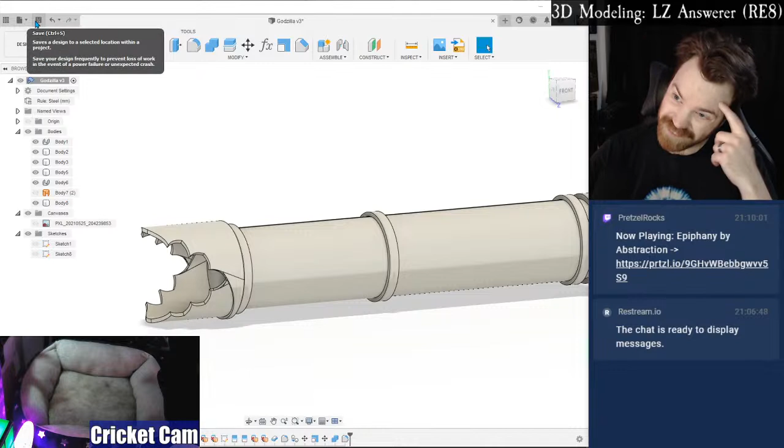Just working on a bit of a commission for a minute. I'm gonna double check everything and make sure it's doing what it's supposed to.

Cricket is here, but she has chosen not to lay in the bed for now.

Why does it keep saying... well, whatever. It keeps like from Star Wars Annual, which is the comic book from the lightsaber that I worked on last time.

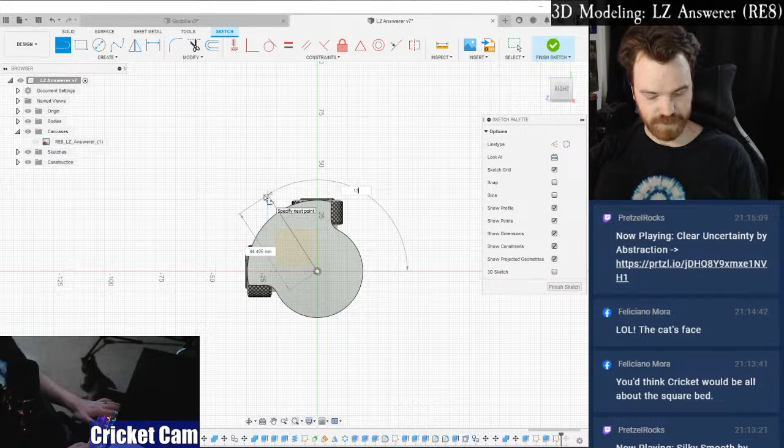And just make sure that I am. Let's see, 180 minus 45 is 135. There we go, okay, I think this will work. So split body, split this by this. Cool, okay.

So this whole thing needs to tilt just a little bit, and then this one needs to go farther. Okay, so we'll move both of these together. We're going to try like 5 degrees. And a little bit more than that.

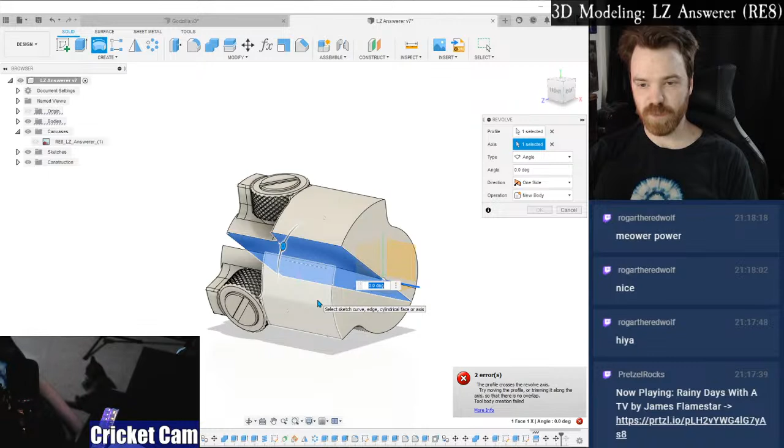And then all I got to do is revolve this around this axis. The profile crosses the revolve axis. Try moving the profile, trimming it along the axis so there's no overlap.

Oh, okay, so we have to take this profile down. Which one's going to be easier, I wonder? Basically, this has got to be split like right along the origin line there, so that this profile is split right across there.

Oh, I know what I can do, I can just split the body like that. And then just revolve that half. And that all gets rejoined together. Cool.

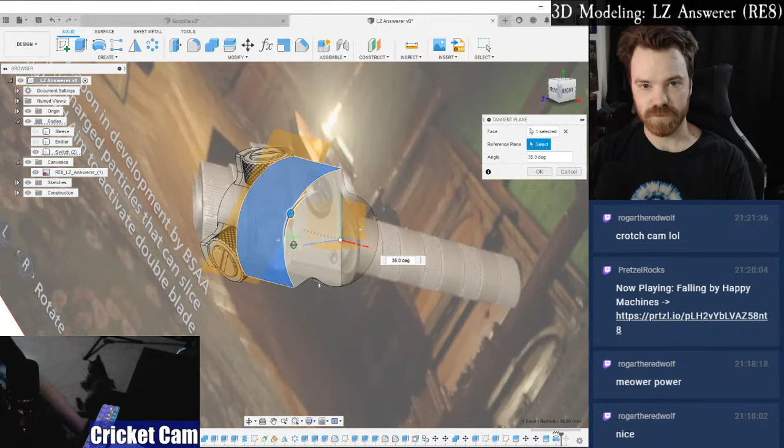So 45 would sit like right there. That's not quite right, let's go up to like, let's try 55. Sure, why not?

And then we just need the width of this. So, yeah, 25 looks about right. And I'm just gonna extrude this out so I can see what the angle looks like and see if that looks correct or not.

Okay, so that's way too high. But if I go back and edit my plane, take it back down to 35, then that sticks there, which seems close-ish. Almost, but not quite.

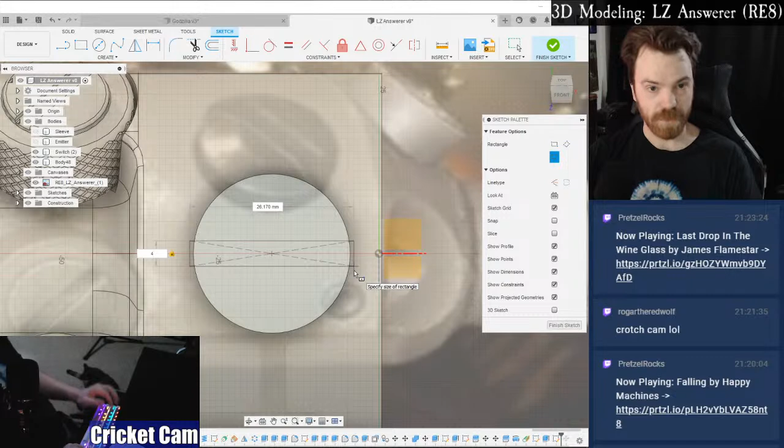And then I want to make a reference line for mirroring, because this looks like it kind of widens out on each side, doesn't it? Let's turn that stuff off. Okay, yeah, that's just a trick of the chamfer. It's actually just straight across.

So I don't need that extra line there, just need to take that and kind of match the angle.

There we go, looking pretty good. Then we'll just chamfer those.

Oh, there we go. Seems like it's taller than that. Okay, that seems more reasonable.

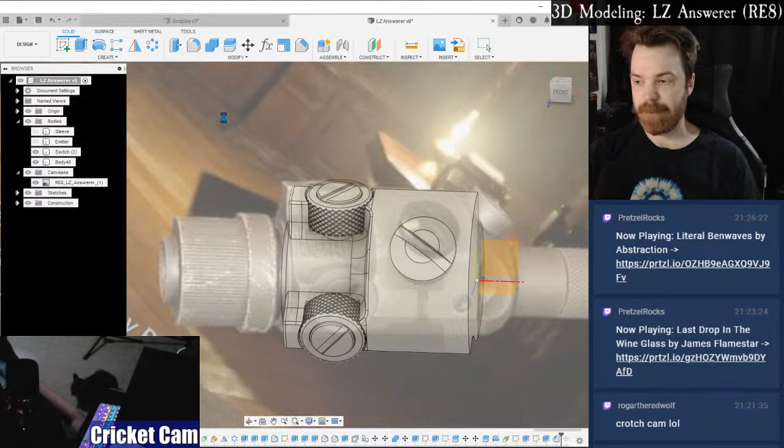All right, so now there's like a little tangent plane, but this time we need it more tangent to about there.

Yeah, maybe 7. Okay, and then let's see, I can go ahead and put this in here.

Come on now, struggling a little bit today. All right, we're gonna grab both of those.

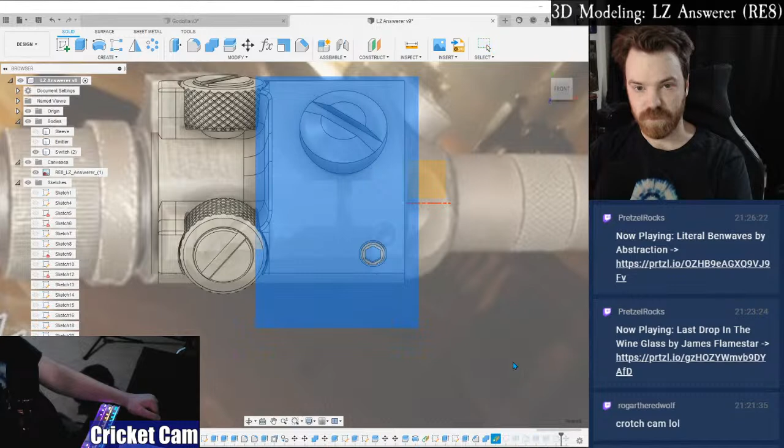There we go. All right, so it needs to move a little bit. We'll edit our feature up just a little bit. Okay, and then it needs to move to the right just a little bit.

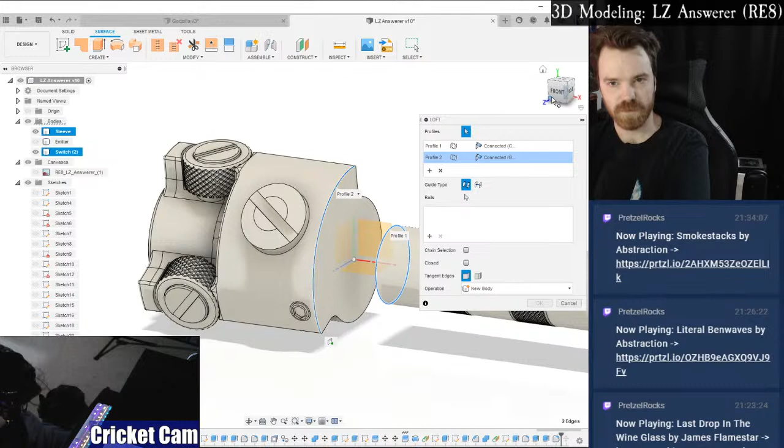Yeah, it's not liking that. Okay. Because I need to know this angle and this angle to basically create another arc right there, so that there's a separate line segment to build the surface on.

Basically a smaller version of this, but there. So I guess let me try something here. Let's see, let's go.

Okay, it says 80 degrees, so it's 10. Okay.

Or maybe what I should do is rotate this 10 degrees back so that it's 90 degrees this way. Yeah.

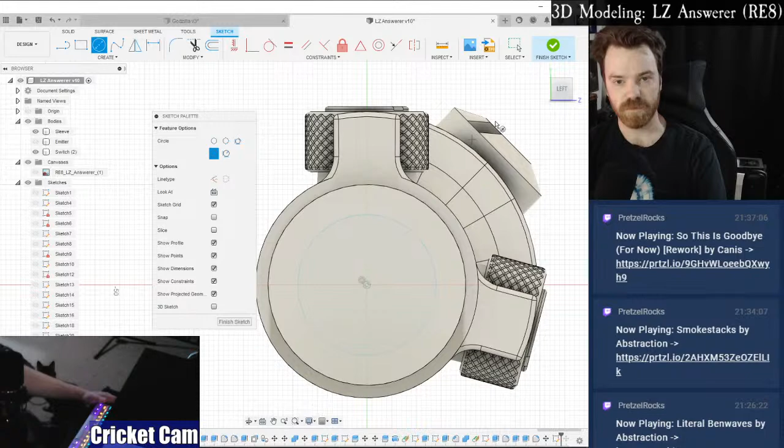Okay, maybe if I'm looking at this on the other side, then I can kind of figure out like where some of this stuff is supposed to go.

So it's like there-ish. I feel like maybe if it's just close enough, then it'll be okay. Because these lines here don't really intersect the center, so maybe if I just like do like that.

And then trim and finish, so now it should just be that one arc there. There we go.

Okay, so that kind of looks like what I'm going for, sorta. I mean, at least for this part.

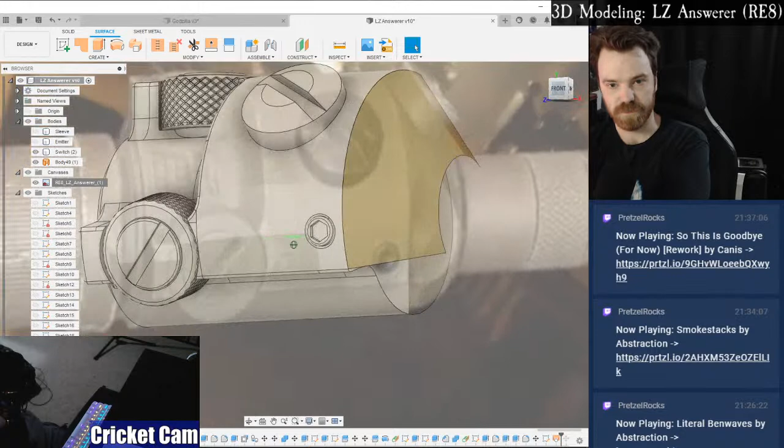Here, let's open this back up, make this semi-transparent. I need to do this, or well, like this, and then it kind of has some kind of weird transition that makes it meet with this or something. I don't know, that's so weird, that's such a weird bit there.

I'm gonna pull up Chrome, and we're gonna see if maybe anybody else has done anything with this. I mean, I doubt it, but it's worth a shot, right? Because I'm pretty sure all the views that we're gonna get from the first person just shows like that first, top portion of it. We're not gonna get a full view of it.

And there are some moments where the character kind of moves it around. This one might be helpful. I mean, it's tiny, but yeah, that's tough, that's really hard to tell what it's doing.

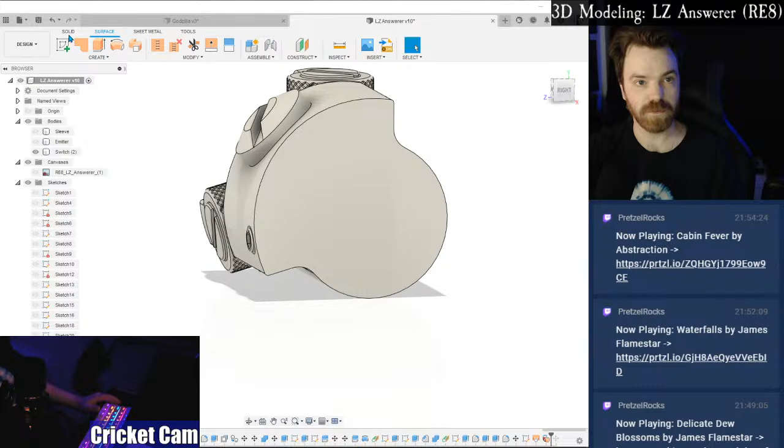Attached to, so we're going to undo that. Make sure I'm on this plane so that I can go like this and snap it. There we go. All right.

Okay, so got 12. So it's about 15 away. So yeah, so if I go 12, then that'd be a 3mm.

Go ahead and make this a new body, because we're gonna have to do some weird stuff to this one. And I think my timeline is getting a little crazy because it's slowing down on even the easy stuff. This seems like a much bigger jump than it's supposed to be, though.

Or maybe that's right. I mean, the width difference seems correct, but you know what? Let's do this. Let's grab. Let's just go ahead and insert a new canvas. I want to grab that one that we just got and scale it.

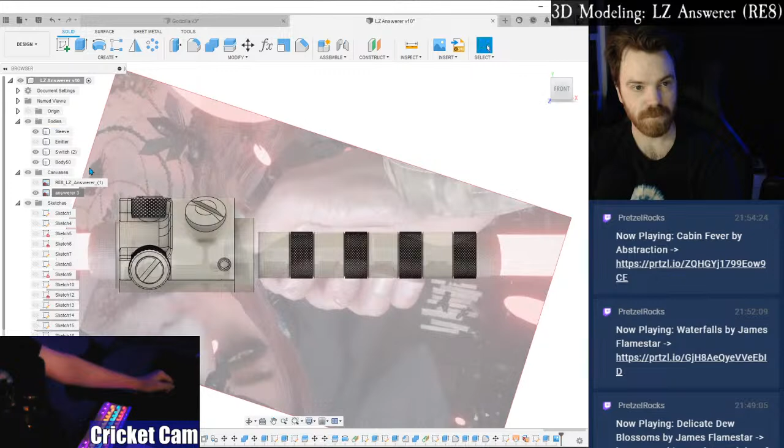That's pretty close. Okay, let's see.

Okay, the proportions are a bit different in this particular view because we've got it to there. That's where it's supposed to be.

Okay, so let's do this. Let's go inspect from here to here. Okay, so that's 133. All right. So that means from here to here should also be 133.

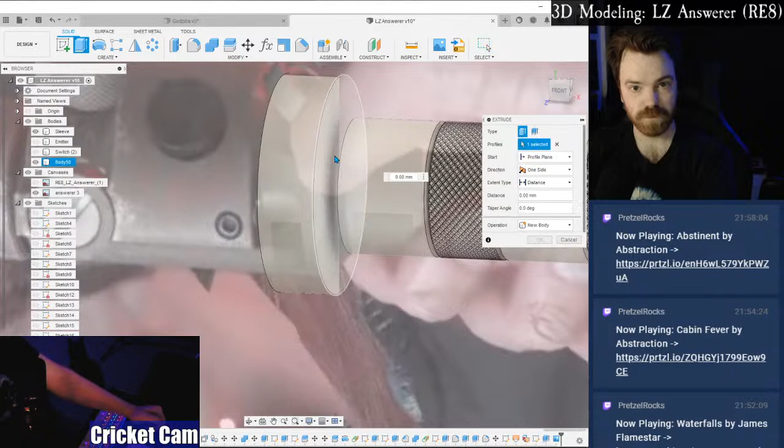Okay, so this gap is a little bit wider than what I thought it was going to be. So I'm just going to take this down a little bit. There we go.

All right. So yeah, so there's that. I'm just gonna go ahead and make that a new body because I don't want to join things just yet.

Okay. All right, let's.

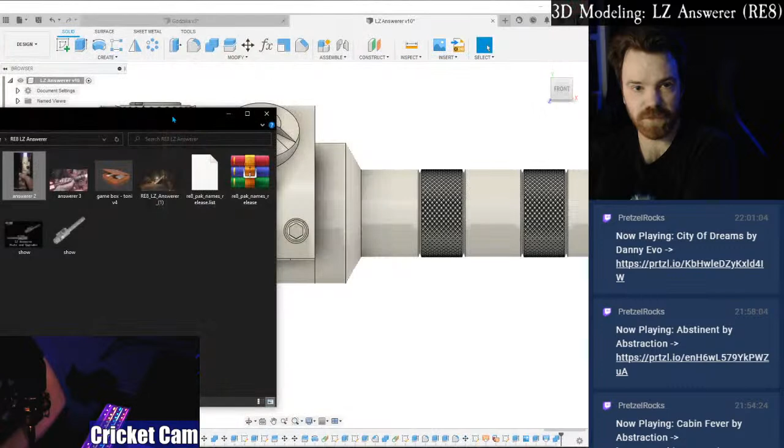So if I can get it to loft from there to there, man, I really need to see that other side. That's what I need to see. But even in this view, I'm not getting that side, I'm getting this side.

Probably gonna have to build a surface out of this. I feel like I need to see that other side. Let's go ahead and save real quick since I made some progress.

Yeah, it's definitely a lower resolution model there. Let's try.

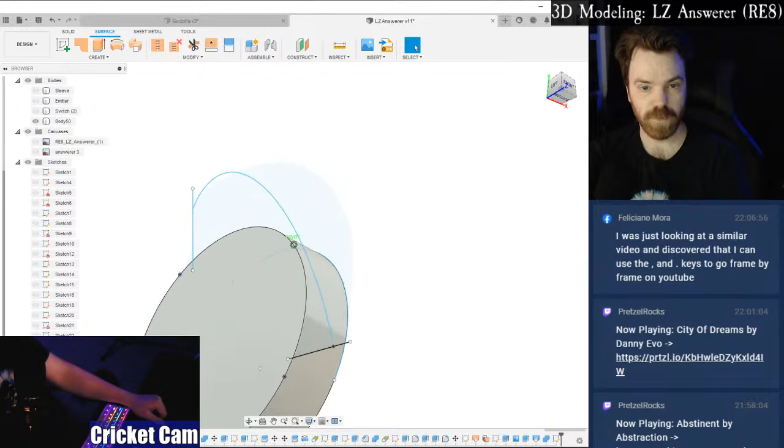Okay, that's super weird. I don't know why it's doing that. Are you still attached somewhere? What's going on?

I guess I'll make that into reference lines. Is that what it is? Nope, that's still doing that.

Okay. I guess I'll go to offset. And then make a sketch on the offset. Because if that's what you gotta do, that's what you gotta do.

I guess I was just hoping to have these references copied over. But I think I could still make it work. I'll just get as close as possible and that'll still work.

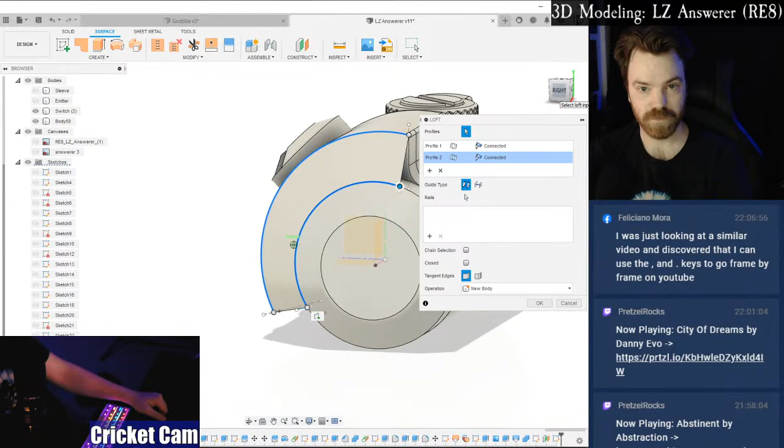Okay, this might work. We're gonna see.

Oh really? Oh man, I didn't know that. I didn't know there were shortcut keys for going frame by frame. That would have helped a lot. But that's all right.

It being that blurry, like... oh wow, that's super helpful. Oh, I guess I could go back to where he's attacking something and see if I can catch him during that swipe.

Oh, here we go. Oh, it's a new thing? Well, that's incredibly helpful, so. All right, let me grab this.

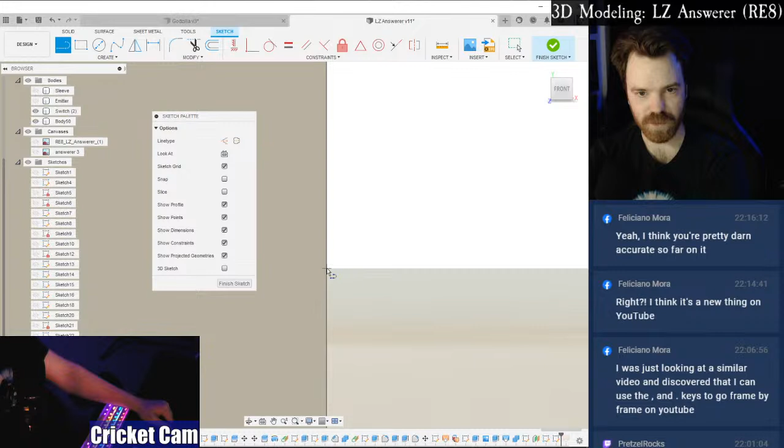Yeah, if I use the revolve tool, it should save time. The hard part about doing this is making sure that it's accurate to the other shapes that are there, because it won't snap to what's already here.

So I just have to zoom in super, super close and basically tell it that whatever that is, if it's within thousandths of a millimeter, it'll be okay. But okay, I think this is gonna work.

Cool, all right, so that did kind of work. And we can go two sides, so I can push that out. And since I built everything on degrees, then that should be...

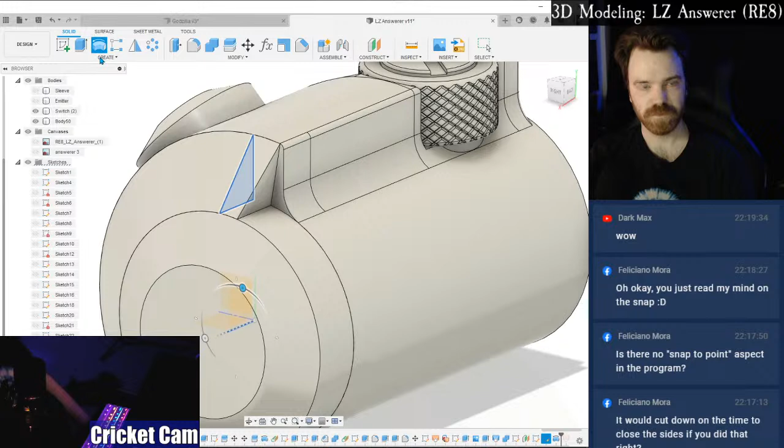Dark Max, welcome back to a new week where we're building the same thing we were last week. We're getting there. I found a 4K video of somebody using the Answerer, so I was able to get some other angles and stuff to try and make sure this is a little bit more accurate.

All right, so I think what I want to try is a loft, where I can just pick these three profiles and then go to, if I can get rid of that, I want to go to this vertex here, or at least that's what I want to try to do.

I mean, that kind of did an interesting thing, but that's not exactly what I'm going for. So I want that vertex. I think I have to make a sketch on it first and just repeat what I've already made.

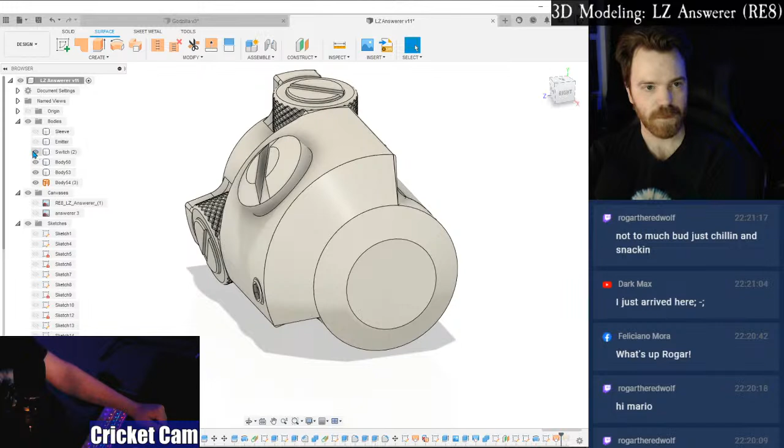So I guess what I could do is make this a surface so that I can stitch it together maybe. See, we'll see if it'll let me do it. So I want to loft from here to here, make a face, and then I want to patch. No, not that stuff. I want to patch this. Oh, okay. Why doesn't it want to do that?

Oh, the surface is going past this revolution profile for some reason. It should have been right on it since I made the initial sketch right on that to loft from one to the other. Or well, I guess it attached there. I should have added this vertex to it as well. So I guess I should go back, edit this loft, and we're gonna add this vertex.

Okay, point can only be used as the first or last profile of a loft. So it doesn't like that. Maybe if I tell it that it has rails. I don't know if that actually helped. We're going to find out. Okay, that's not what I expected to happen.

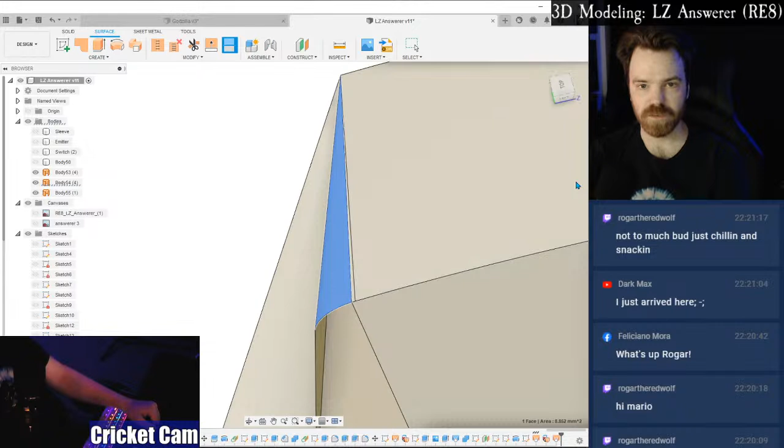Loft would intersect itself. Okay, so it is still overlapped a little bit. Okay, I think maybe I can trim this. If maybe that's the trim tool. Nope, that's not going to work. I need to split this. No, that's a different face. Maybe I just need to delete that one.

Oh, okay. Maybe I just worked it out without really knowing I worked it out. Nope, not that. Nope, stop it. Ah! Okay, so that one's attached, that one's attached. There we go. It really doesn't want to put that together. I'm not sure why.

It doesn't like it. All right, sometimes when I run into this, if I do individual lofts, then it will... Okay, self-intersecting geometry. Let's see what's going on here. Loft. Let's see if I can loft from here to here. Okay, so I can do that, and then maybe I can loft from here to here. Okay, it's letting me do that. Repeat from there to there.

Okay, so that might work because when you stitch faces together, it has a little bit of a tolerance, so it might let me do this. Yeah, okay, so see, it's gonna stitch those together. It says these are free edges because it's not - I didn't select the rest of it, but cool. All right, now I just need to do that to that end.

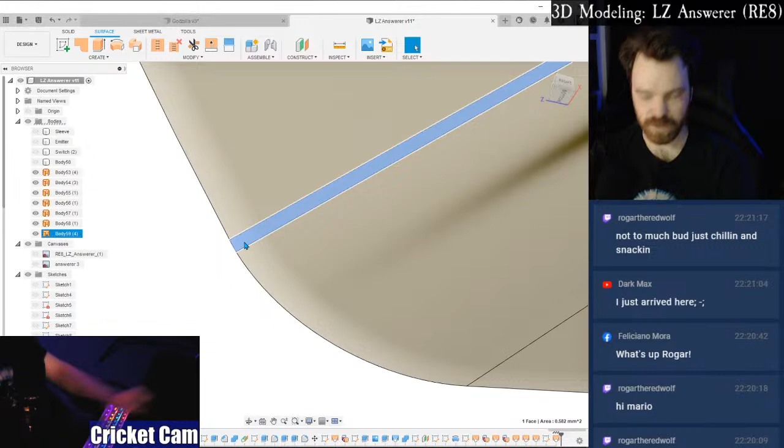All right, and then there was like a little face there. Get rid of that. There we go. Yeah, that looks right. And now we'll just repeat, taking it one at a time, so we don't end up with intersecting geometry. There we go. Stitch.

Oh. Okay, so it's got a red line there. Oh, that worked out okay. What are you angry about? So it's got... Oh, okay, so there's a gap. There is a gap somewhere.

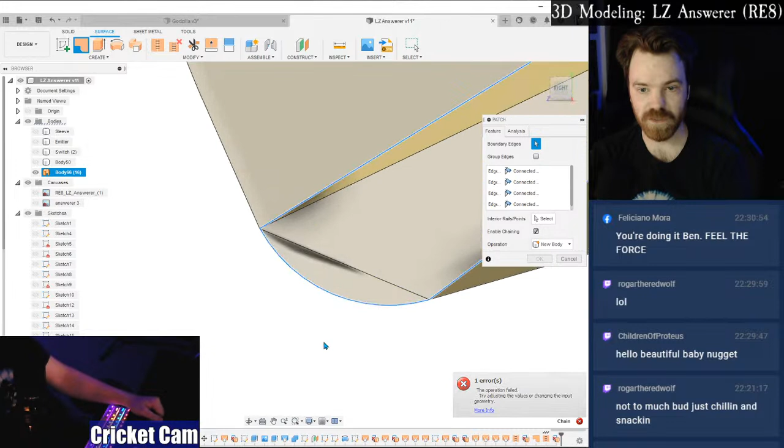Feel the force. It worked on the other side. What the heck, man? I suppose I could slice that off and mirror it, rotate it down into position and just attach it to this one. I don't know what's different about this. It shouldn't be different.

I'm gonna try this loft again. Go from here, here, and here to here. Oh, I didn't like that. Now it just won't even do it.

All right, maybe I should start over. Okay, so that's when I lofted. Deleted that face. I have to get rid of this extra face, right? Okay.

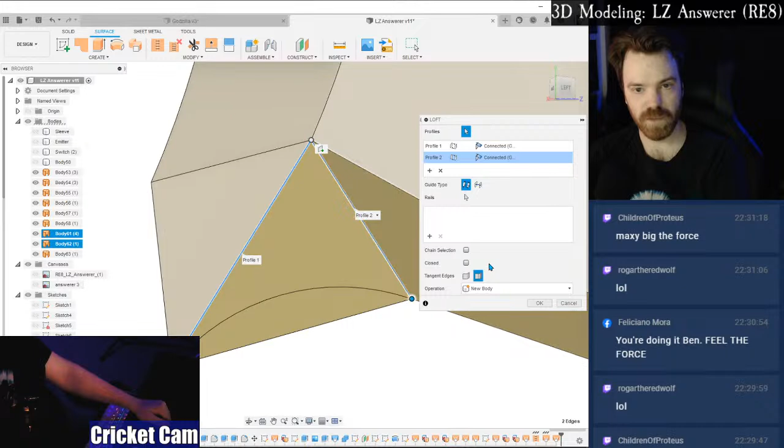Then I went from here to here to here. Nope. I patched it. I don't know what I did. There we go. All right. Hooray! It's all green. maxy big the force, oh my gosh. Okay. So that means there we go. Yeah, yeah, that looks okay.

See if I can get this to combine without it getting angry. Huzzah! It worked. A Jar Jar Binks lightsaber - that is an interesting suggestion. Might be something for the future that we can put on the list. We'll see.

Come here, kitty. Look how comfy that is. You gonna eat some food?

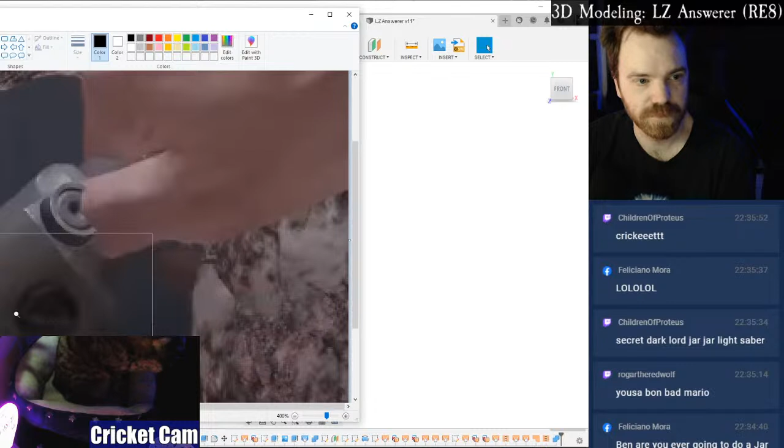Where's that other view? Didn't I get another view of it? I thought I did.

Yeah, so if you follow this line, then it's just barely different there. I probably could have widened this gap a little bit to make this slope just a little bit more, to make this just a little bit wider, because we also have to fit this giant honkin' thing there, and that looks serious. Yeah, if this has got to go there, that's not even gonna fit. So I actually have to stretch this back a ways, which is oh so awesome.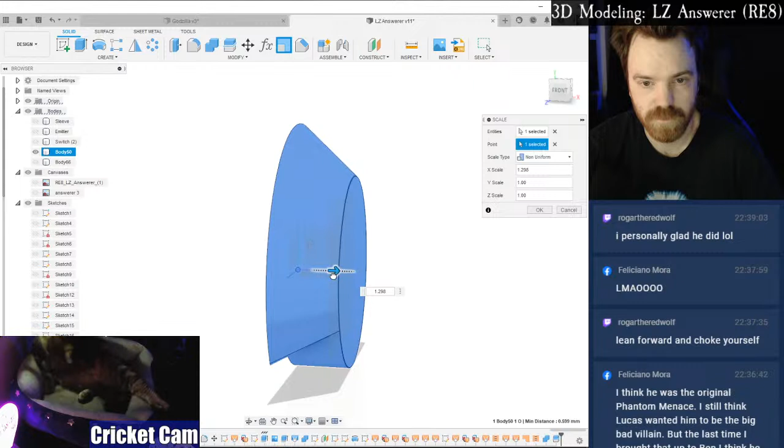I want to make sure the slopes are a little bit more different. Okay. Let's go point to point.

Yeah. Who are these people? What's going on? I think that happened to everybody when they watched episode one. But if you look at crowd reactions of people coming out of the theater that saw episode one for the first time, they were ecstatic, they thought it was amazing. And then a weird thing happened where the media and critics started telling us that Jar Jar was horrible and that episode one was trash, and for some reason we all just bought it. It wasn't really hated until much later. I still like episode one because I don't buy into that stuff. Jar Jar's a silly character, but he was meant for kids. Yoda was a silly character too, and everybody loves Yoda. But if Empire Strikes Back came out when Phantom Menace did, people would be like 'Oh, Yoda's such a stupid, silly character.' And then you learn he was a Jedi Master, and suddenly he's so cool. Come on.

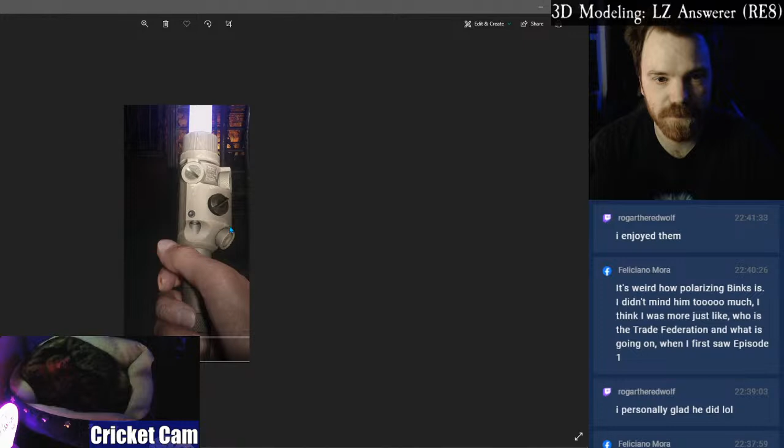All right, so if I measure, we got 17 millimeters across there now, which means the largest thing I can put there is around 15 millimeters, because it has to sit within those bounds there. But if I look at this versus that, I bet those are going to be pretty similar in size, which means that this is around 1 inch and that's around 1 inch. But just to be sure, I can measure this in Photoshop.

Oh yeah, for sure. It was the first time we got to see a double lightsaber on screen in live action, and the pod race was really cool, and it spawned the pod racing Nintendo 64 game, which is really awesome. I think there's a lot of great things about it, and I think people just have their memories colored by media and influencers that didn't like it.

Yeah, just look at Yoda's seagull song. So silly.

All right, so this is 49 pixels, and this is 49 pixels. They are exactly the same size, and I made this 25 millimeters, which means this is 25 millimeters, which means this diagonal has to be at least like 27 to have a millimeter of space on each side. So that is still not big enough.

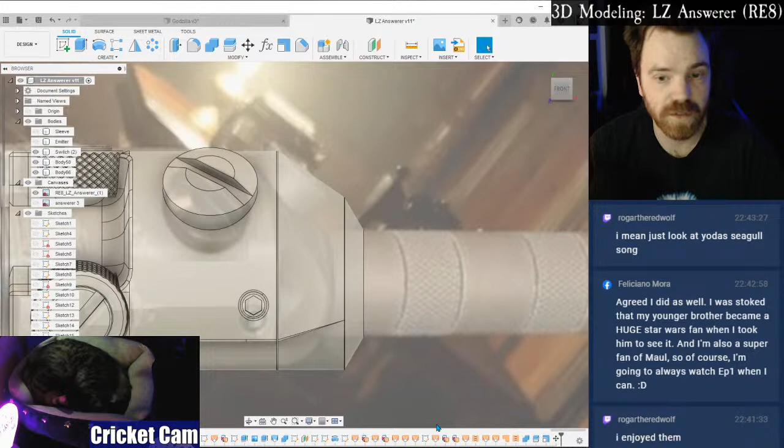Like I said, artistic interpretation, right? Makes the taper a lot more contrasting with the original there. So I'm probably gonna have to go even a little bit further. Yep, 23. Okay, oh man. All right, so we're at 2. Let's go 2.25. 25.5, we're so close.

It's gonna turn that off. I mean, I know it looks funky, but I actually think this is better. Obviously the sleeve is running into it now, so that's got to be scooted down as well, but no biggie. Let's keep pushing a little bit, I guess. We go another 10%, see where that puts us. You think 2.45? Well, now we're at 26.3, so you might be right. It might have been 2.45 as opposed to 2.35. Every 10% seems to be about half a millimeter or so, ish. There it is, 27. That's all we needed. We just need an offset of 1 millimeter on each side to be able to put that big plug there.

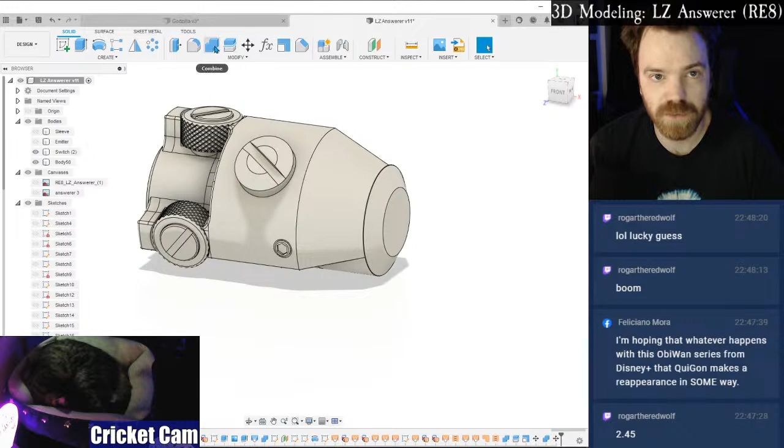Okay, I think all the other features I need to do are things that are added to this. So there's a cutout that happens here, and then there's a big button that goes there. So I feel like I can go ahead and combine these two and make that all one shape. It was a bit of a lucky guess, but that's what I have you around for. Good luck.

Yeah, it would be cool if Qui-Gon makes a reappearance in the Obi-Wan series. However, Liam Neeson has been not only tight-lipped, but he actually said he's not in it, like he hasn't been approached. Now, we've been fooled before, because they might be doing a...

There we go, like one thing. Our friends, Children of Proteus, they have their dog on camera, and they have a thing where you can pay bits, Twitch bits, to feed a treat to the dog. And I'm like, you know, if I ever do make affiliate again, maybe I'll do something like that where I'll have reward things for the cat so she can get treats and get love and all that stuff. And maybe that'll encourage her to come hang around whenever she sees me at the computer. She'll be like, ooh, if I lay in the bed, maybe I'll get treats.

Okay, so that big honking button there basically exists right on the edge of this. So if I go 90 degrees, it's going to be not quite right. So I think I need a tangent plane that is just a little bit off of that. So I'm going to try a tangent plane off of this, but instead of 90, I'm going to try 15 degrees off. And since we're going to sketch on top of this, it'll move the button as I edit this feature. So that'll be advantageous.

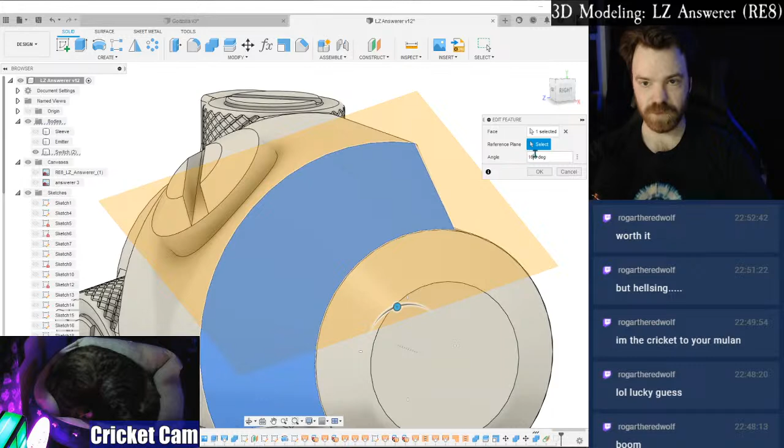Okay, so this overhangs a little bit. I think if we change the angle, let's go another 5 degrees. And that was it, 5 degrees did it. Actually, that brought us just a little bit too far from the edge, I think. I want it to be right up on the edge. So I'm gonna go like, let's go 16 degrees. Not quite.

I should have gone with my gut instinct, because my gut instinct was like, oh, do 18 degrees, split the difference. Oh, and then I get to the top and it's like, oh, look how far that is away. From here to here, it's almost 1/8 of an inch. So I can actually go back to this. Maybe go back to 17.

16. There we go. See if it reorients me here. Nope, it won't. Okay, that's fine. How do I... there we go. I just wanted to center the... Ooh, that is really, really close. Okay.

Let's go in here, and we'll go back to... You know what? Let's go 16.5. Give just a little bit of space. There we go. Yeah, so it's like right up on that edge there, which is what I see in the images.

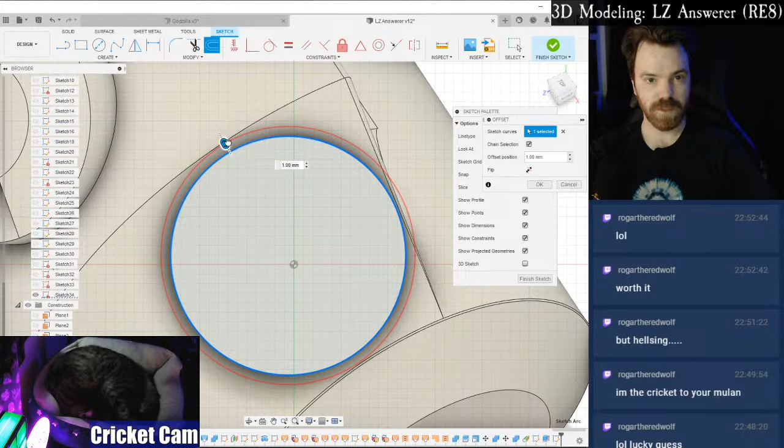Looks like that might be the activation button, because that's kind of naturally where your thumb would sit. So we need an offset, and then it looks like maybe like a spherical indentation, maybe. Yeah. Okay. So let's offset this. It looked like maybe around

-4. And then let's do, okay, so that's 17. So let's do something close to that for the button, the button that you depress part. All right, so then we'll grab that, cut in.

Okay. And let's see. Yep, definitely filleted on this one. And then maybe like a small fillet on these, just to set that back. And then let's turn that sketch back on. We'll create a sphere.

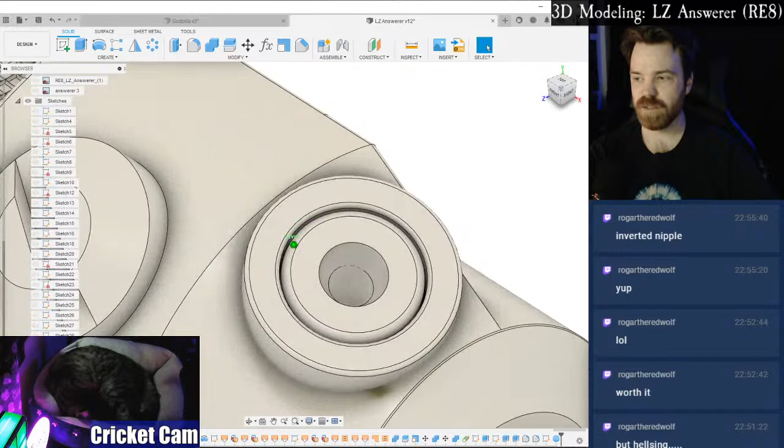that looks about right. Let's see if just a straight up cut. Yep. Alexa, stop. I don't know why she decided to tell me about Bahrain. That's really weird.

I'm wondering if I should make that shallower. Make a new body. Scale it. Pick a new point. Go down to like 0.5. And it looks like I need to rotate it as well. What is happening right now?

I'm going to try and get these to line up as close as I can. There we go. Let's go ahead and cut that out the rest of the way. There we go. Join those two together. Keep this as a button. That looks pretty right on.

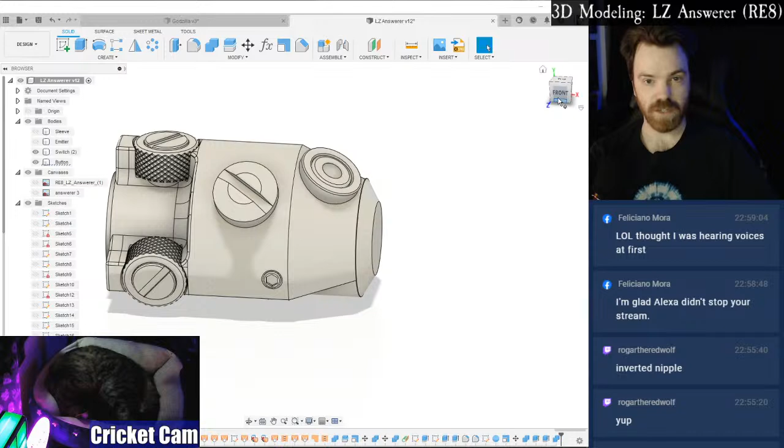All right, so then there's this weird cutout that happens like right there, which means we're going to make a shape and then use it to cut into there, and hopefully it'll be right. I do need to move the sleeve down. There, that's a little bit of a gap right there, but not a big deal.

Maybe you are hearing voices, Mora. Maybe it wasn't Alexa. I probably shouldn't say her name. She's gonna wake up and talk about things.

All right, come on. There it goes. All right, all good and saved. Enough, like, and... like you can't even see that extra end piece coming off of that.

I mean, none of these views are like perfect, but I think just proportionally, I'd like the handle just a little bit longer. So we might have to go back and change that a little bit. Just kind of lengthen these sections just a little bit maybe. Or maybe I could just like scale it and stretch it, but then that would stretch these textures too. That might not work out as easily as I want it to.

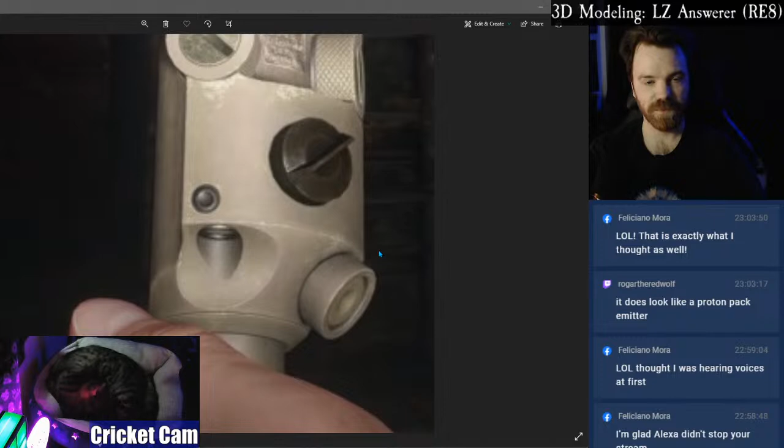All right, let's... basically I want to cut through right here. Maybe it's kind of like that.

Yeah, the fishing rod controller, that thing was weird.

All right, I want to see what this does as far as the cut goes. This might not be right. I feel like I'm close though. Like it's way shorter on the right side here, like where the cutoff stops. So maybe it's like sitting at an angle and not just a straight on thing.

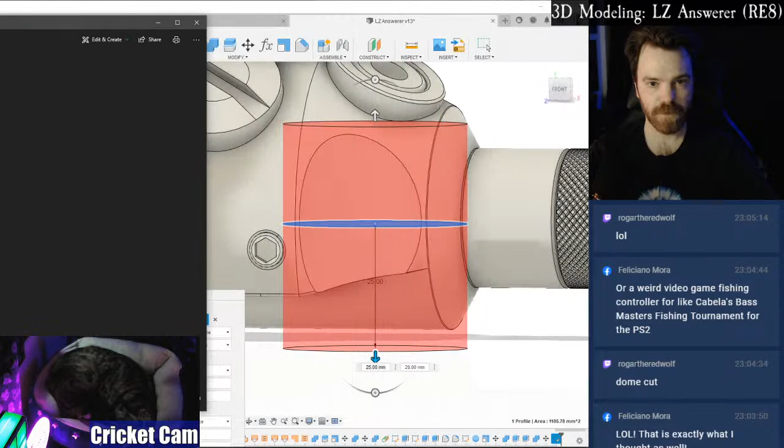Because I want it shallower, but wider. Okay. I don't know if this is what's going to do it for us, but we're going to try it. Okay, so that looks closer actually. The center of it, like you can see this curve here, it does dip back up, but the center of it, I guess. See if I can get both of these on screen.

So it almost looks right, but this right here is not right. It kind of feels like the circle itself needs to be offset, and the cut needs to start from the maximum diameter of it. So I'm going to do one side, but start from an offset, and make the offset like -20.

Okay, that didn't do anything because it's a cylinder—it's the same no matter where it is. So I think maybe it's sitting at an angle or something. It must be. Okay, so here's what I could try to do.

I can just make, okay, actually the profile plane—just make it big enough. And instead of cutting, let's just make it a body. Then maybe I can rotate this where it's going to intersect better. I don't know.

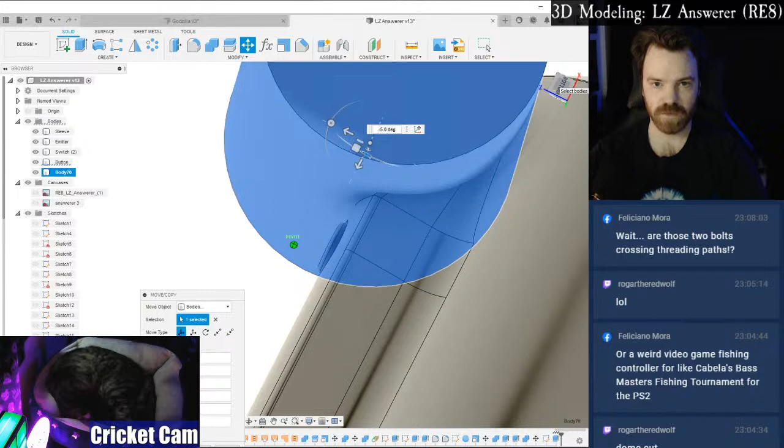So if I go 5 degrees this way, it cuts in right there where it's supposed to, but then this side is messed up because that goes way too far. Okay.

I suppose I could, hang on. Okay, the diameter is 37.5. So I know how big the circle is. Okay, maybe I can...

Edit sketch, grab it, move copy it, and then we're just going to rotate it. I think 10 degrees is almost there. 15 is more correct, I guess. Wish I could get where I can view this straight on, automatically, because I think I need to be here.

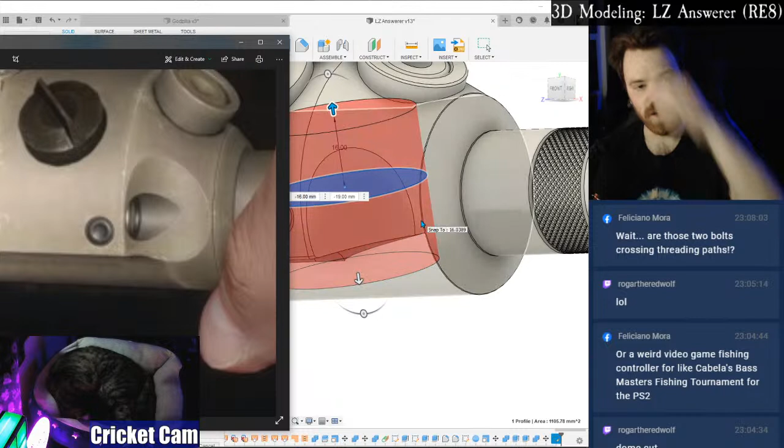I guess maybe it's not completely... I guess it's maybe not a cylinder. Maybe it's like a weird ball shape. Maybe we need to make a sphere and squish it around until it looks right, and then use combine to cut it out, because I think doing a single profile just isn't quite right.

Are those two bolts crossing threading paths? Probably. Well, unless this one is a set screw, then whatever this is, is some kind of adjustment, and the set screw holds it and keeps it from unscrewing. So that is a possibility. I've seen that before.

But yeah, I think it's close—but it's not right. It's close, but it's not right. Maybe it doesn't have that shape because it's actually supposed to cut into this as well. But I'm just missing that.

Because even if I go farther down, yeah, I just miss it. So maybe I do need to cut in farther. Okay, idea—I want to move this in.

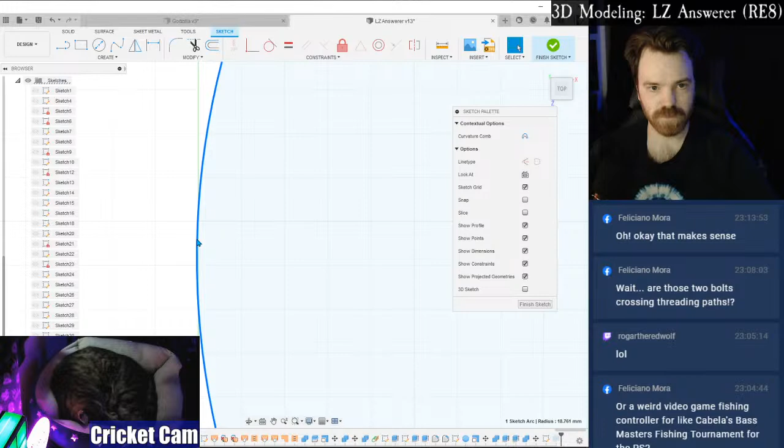All right, so I want to bring it in just a little bit. I'm gonna bring it in like—hey, come on now. Usually it lets me do that. I don't have any constraints. Why doesn't it let me pull and push and pull it around?

Let's try. See, because if I grab this, then that's just okay—yeah, that just moves it around. Usually I can pull on this, and okay, maybe I can make it a constraint. Dimension.

Okay, so let's go 37. Finish. So close—so very, very close. Okay, 36.5.

And then I want to move it over, right? So edit, and then I want to grab the whole thing and move it. Maybe not—let's go like 0.5 first. Did I do it? I don't think I did.

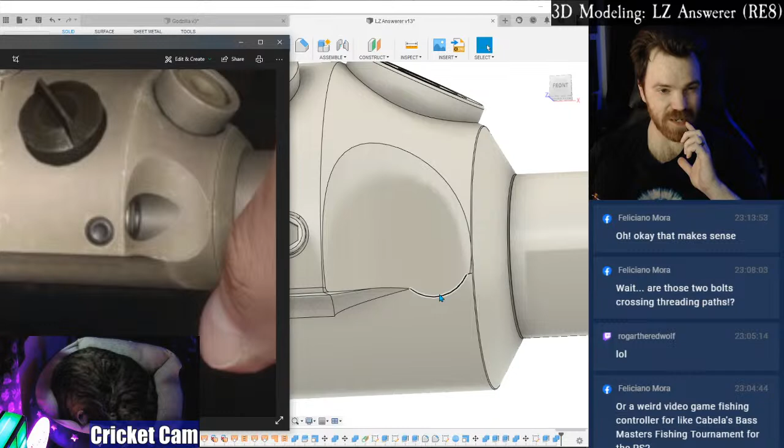Okay, so I just barely hit that, which is correct. Main difference being that this curve is a lot wider than this one is, which means it's cutting deeper, maybe. Although that seems pretty deep.

I don't know if I should make that curve more or not. But a smaller diameter circle pushed in will cut deeper and make that shape closer to correct. So, all right.

We're getting close, we're getting so close. All right, so if I go down to like 34, and then I move this in a ways, let's see what that does.

Okay, so that gets me a lot closer to this shape. Like almost exact, but it's not quite right. So I'm going to split the difference. We're going to go back to like 35, and we're going to move out a little bit.

Cool, I feel like I'm really close now. Just need to move over a little bit. Close, very close. Go down one.

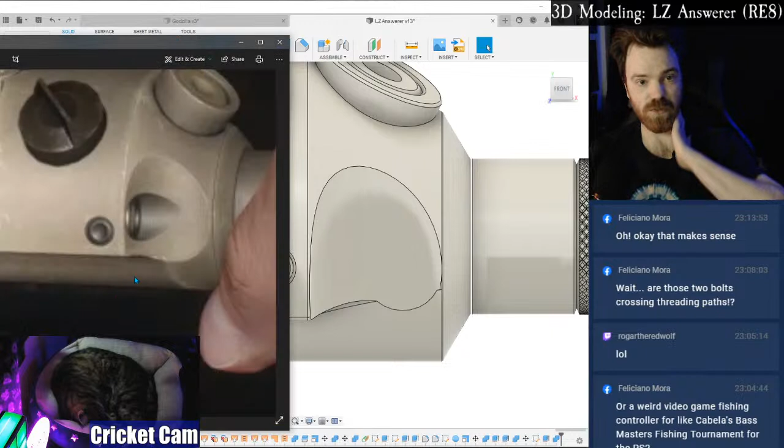Wow, all right, I think that is as close as I'm gonna get to this part of the image. Like it has like a weird curve to it, but also this is more looking like this way. So this should be much wider.

Yeah, because this is like the amount that I'm cutting into this cylinder here, and I need to do that more. So

I could also try going, oop, maybe another 5 degrees. So that cut into it more, but now it's too narrow.

Okay, hang on. I think I need to go back to like 36. And then we got to move out 0.5. And then I think I have to move this way 0.5.

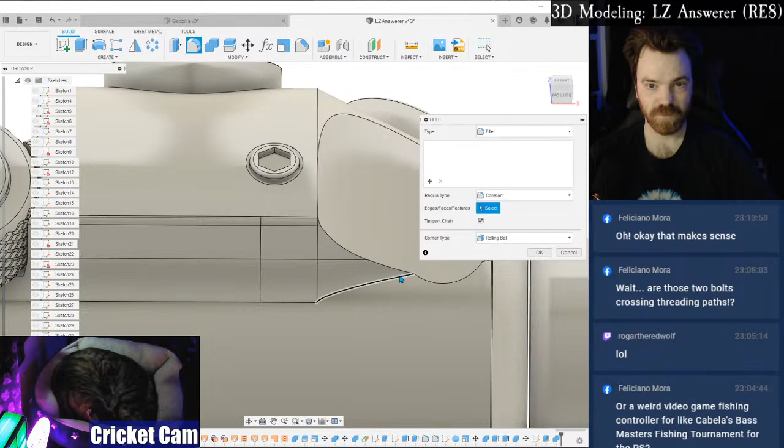Maybe that's close enough, you know? Maybe that's just where we need to be. There's a possibility, maybe, like, can I... Nope, it doesn't want to do that. Okay. Doesn't want to do that either. I thought maybe I could get it to, like, fill it or something. Nope. It definitely doesn't like that.

As I get larger diameter and pull away, this will get straighter and straighter because it won't cut into this face, and this is the face it needs to cut into, but it has to cut into it more gradually. So maybe I need to push the angle a little bit more.

I just want to try another 10 degrees. I want to see what that does. Too much. But now maybe I can go smaller in diameter.

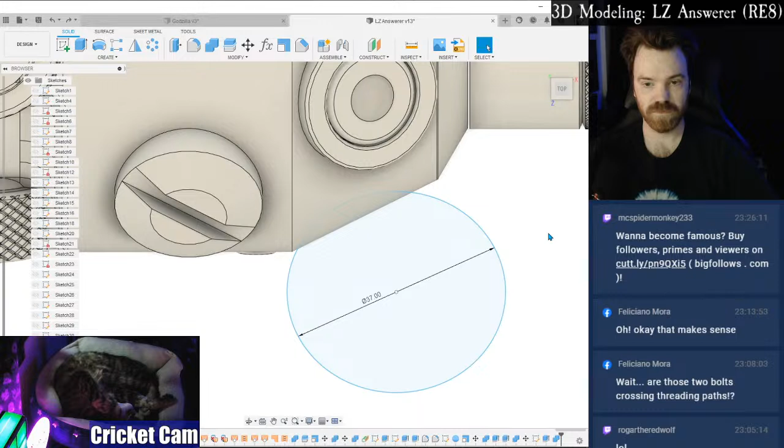All right, I'm gonna go back to where I was. Oh, I think I made it angry. Thank you, sir, appreciate it.

Okay, so this is the top-down view. If it was more like a, that way. Okay, hang on.

If I try to draw something new, it's not going to be rotated at the angle. So maybe I can make, yep, okay, I can make a plane on top of it. Make another sketch on top of the sketch. Create a spline that will, oh, hang on.

Okay, well, I just got a message from Broken Token. They contracted someone else. They said I have cool stuff, but they didn't pick me. So that is a bust. Yeah, it's all right, I kind of figured I just didn't really make the stuff that they were really hoping for. I bet if I spent a bunch of time and made like board game pieces, like terrain and stuff, then they'd be all over it. But...

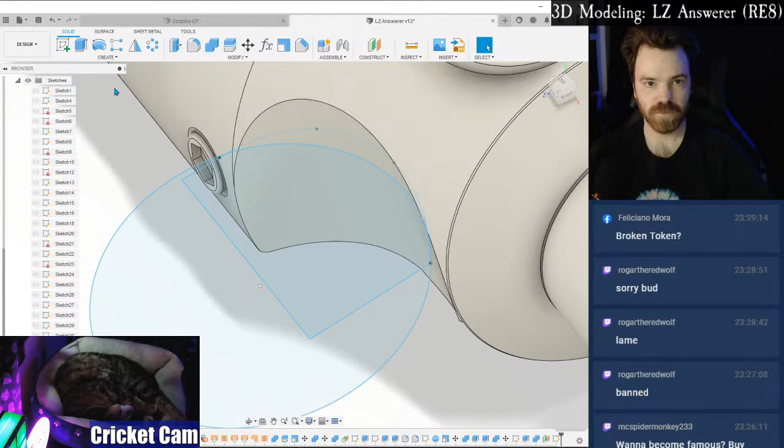Okay, I'm going to try this now. Okay, so it's definitely going to get longer that way. No, not symmetric. Oh, I guess maybe symmetric will work. Nope, not quite. Two side. Let's see what it does on the bottom here, though. Man, I was really hoping that shape would bring that out a little bit more. I mean, it kind of did.

Because if I go too deep on this way, then okay, maybe. Oh man, this is tough. This is a tough cut. All right, let's pull this down a little bit. Make this shallower too. So it's more like that, maybe. I'm gonna get rid of that.

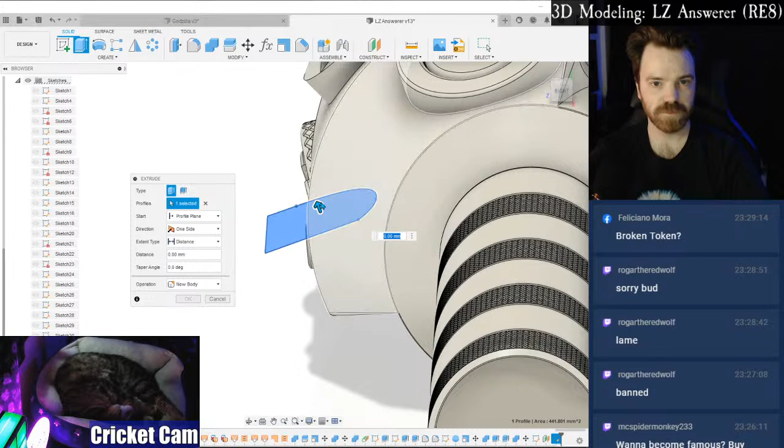All right, I think I want to take this. No, not that. I think I want to try and angle this one. Oh, I need the pivot more like there, I think. Yeah, let's just try 5 degrees out that way. Okay, that's looking pretty okay so far. But I wonder what the bottom's going to look like. Okay, so that is like almost working. It's a heck of a lot better than it was. So we're going to keep that, and then I'm just going to adjust the drawing.

No, guys, it's okay. They said if in the future, then maybe, but not a big deal. I will continue doing what I'm doing, and we will look for ways to make the lightsabers and the 3D models that I do successful.

All right, come on. Oh, there we go. I had to grab that one. That's what it was. So I got to pull that one in a little bit. We're going to pull this in a little bit, I think. All right, come on now. Okay, and I want to pull this one just a little bit. And then I want to make this even shallower. Man, I feel like I'm getting really close. What's your problem?

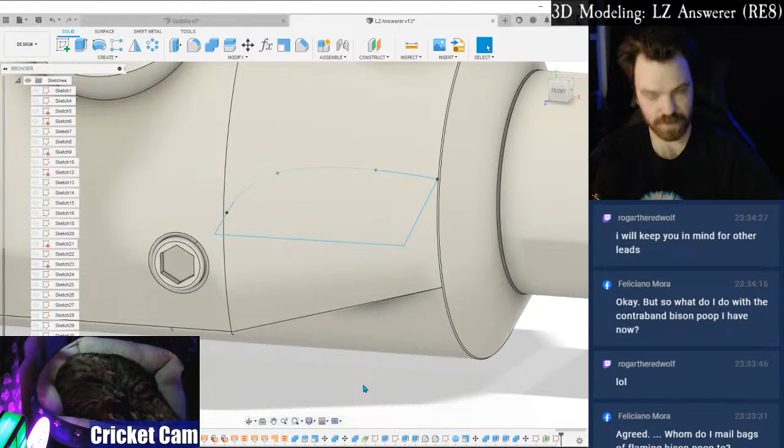Missing profile, it's right there. Okay. Well, this is weird, it won't select that as a shape anymore. Wonder why that is. All right, I guess we'll move. Oh, okay, yeah, somewhere it broke.

I'm sure we can come up with something to use your contraband bison poop for, I guess. I'm just gonna say it's really weird that you have that just kind of on hand, ready to go. Just gonna say that.

Wow, I move one vertex and then it's just like, hey, that's not a shape anymore. Like, what the hell, man? Nope, don't do that, come on. All right, come on. Okay, that's frustrating. Well, how am I supposed to change the shape if it won't let me change it?

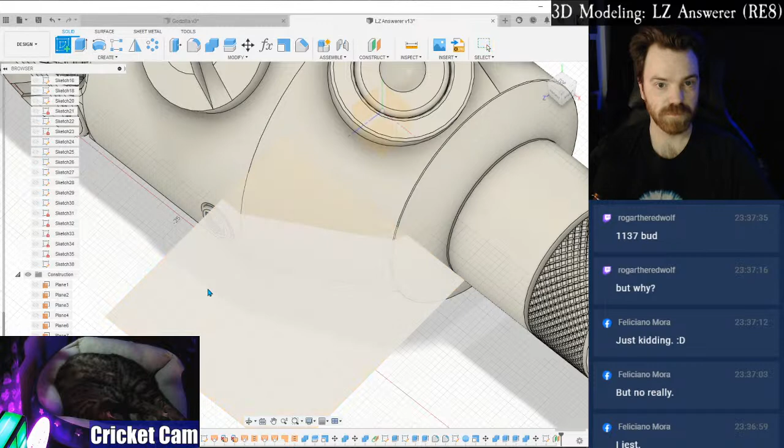Okay. Get this back open, all right. Try this again. I want from here to here. There we go, all right. That is a shape. So I'm going to go with like more like a rounded rectangle. I want to see what that does.

Oh wow. That's a long time to have poop on a shoe. Okay, interesting.

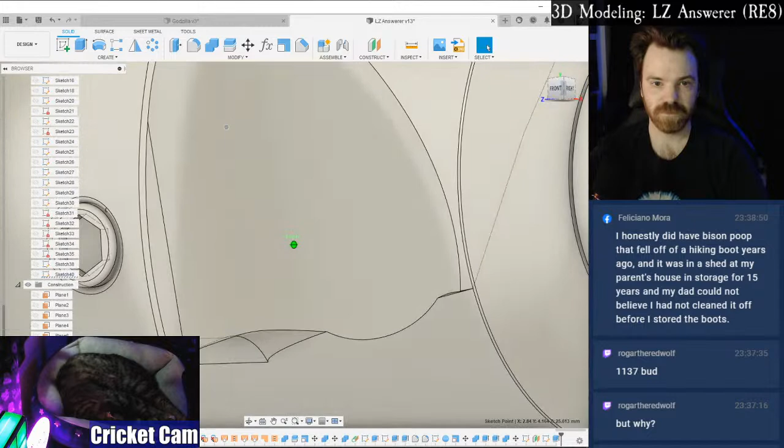Hey, look at that. That's like almost right. I just didn't quite cut that off. So that means that this part of the slope is good. This part is a little bit too deep because it didn't even quite cut off there, and it's supposed to stop about here. That could be fixed with changing the angle maybe.

Well, that's offset, that's not tangent, so it's not going to let me rotate that. So let's go back into this.

And yeah, it's this right here. So if I pull this up, see what that does.

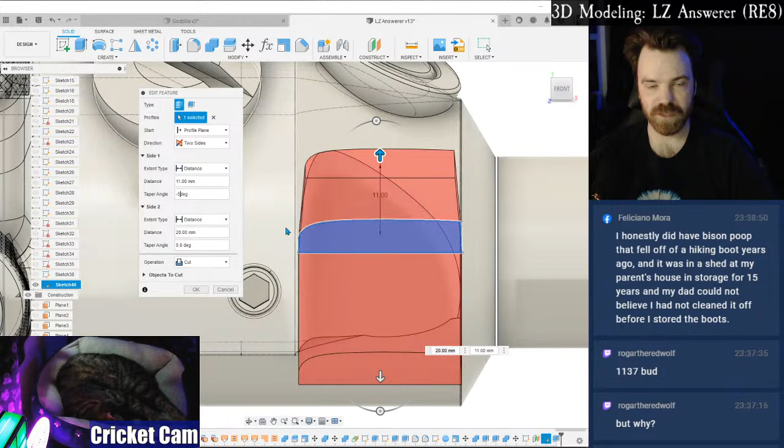Oh, that kind of does a weird thing though, doesn't it? Because it kind of like brings that in. Like I can taper a little bit and kind of cheat that, but it's not going to make that look right. So that doesn't really work. Tapering is not exactly what I need. So what I do need is I need to move it out and rotate it.

Okay, so let's go back into this. We're just going to move the whole thing out. And then put that on the midline, midpoint of that line. And we'll just go, let's go 5 degrees.

Well, that nearly worked. Okay. I think the shape I have is right. I just have to figure out like where to put it and what the angle is.

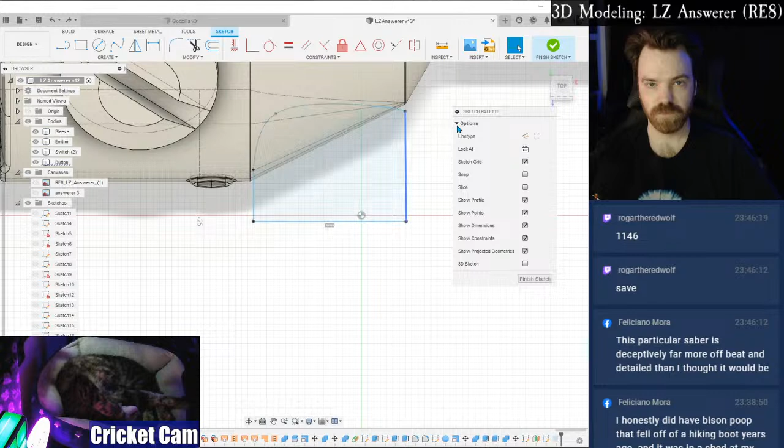I should be able to rotate this and be able to edit it. Like I don't know why it's doing that.

Okay, we're saved. Let's turn off things I don't need. I know I can like copy and, but I have to pick a line. Okay.

Hit OK on that. And then edit sketch. Copy. Make a new sketch. No, not on that. Make a new sketch on this plane. Paste. There we go.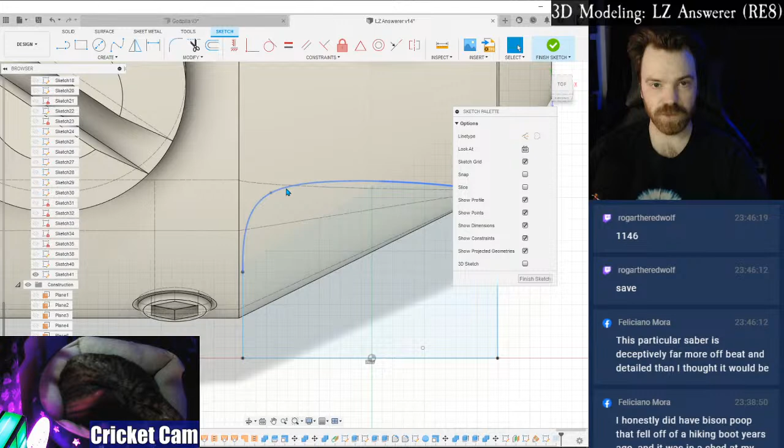Okay, so it's this part that, like, this part is doing great. This part not so much. So maybe I need to like slope this more. Widen this out. Like just make it softer. Right?

And then I end up with that again. Damn it. And that's still like super tall. What the hell? What a weird angle. Okay.

So obviously I need to bring this down so that I can have this more like this maybe. So that this can be maybe like that. Because where it crosses here, that's where that circle shape is going to come in down there, right?

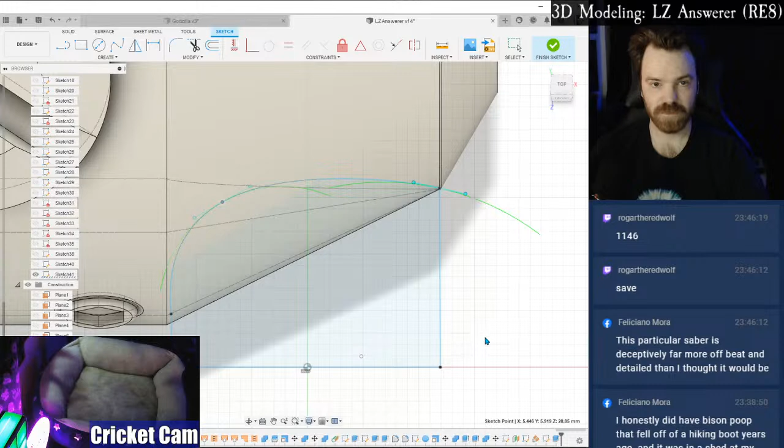Okay, that's looking pretty good. Just need to get this part to kind of flatten out, I guess. There we go. I think that's as good as it's gonna get. Honestly.

I don't think this is gonna work, but I'm curious. Nope. Okay, how about this one? Nope. Okay, just thought I'd ask. There we go, okay. We're going to say we're sold on that, so that we can get to drilling the hole right there.

All right. So the screw here, most of that.

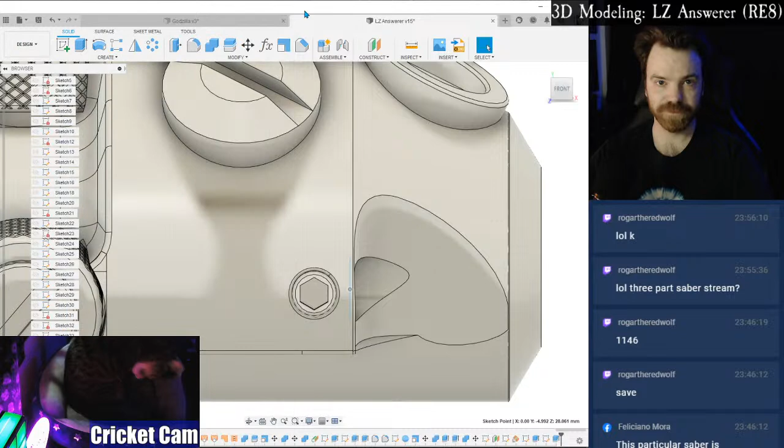Need to go bigger, need to go bigger. And that's weird. Well, now that's too much. What I had was good. Stop messing with it.

All right, and then we'll put a screw in here. It's really hard to see what kind of screw that is, and I don't think we get any view that's going to show us what that is. But considering that we have flatheads and hex key, I think we could just go hex key, and I think that'll be fine.

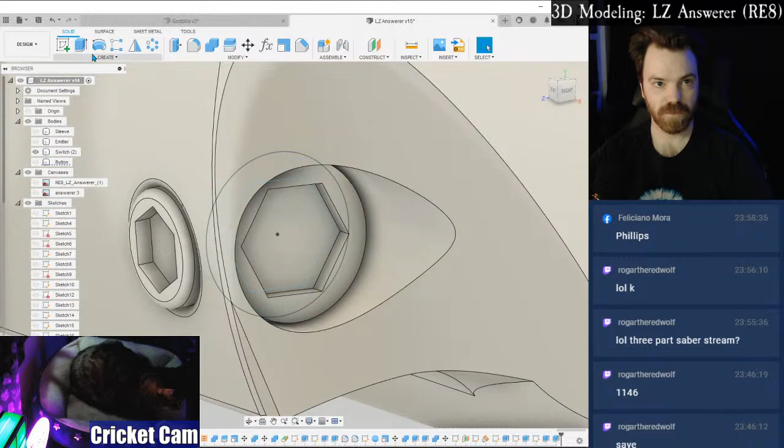Metric. Okay, now you're toeing the line there, Mora. You're toeing the line, you're on thin ice. Thin ice, buddy. Starbit, come on guys.

I think that works. All right, so there's all that weirdness. I'm pretty sure that, minus the nameplate, that's all the major details on this guy. I still kind of feel like maybe the handle should be a little bit longer, but I can't do that without messing up these things. Ugh.

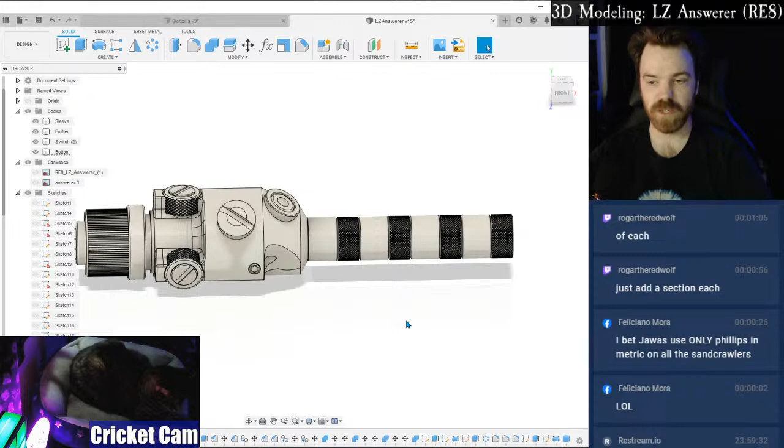Add a section. I can't really, because of the way we made these. I would probably have to just rewind time back to where I was dealing with these in particular. Because, see, there's the combine command on that stuff where I was putting them together. So I would have to go back to, let's see, chamfer, copy, chamfer, move, chamfer.

Well, here, before we roll back time, let's save one more time. Well, I can't make a pommel because the blade is supposed to come out the other side as well. It's supposed to be a double-bladed thing, so we have to keep that open and available.

And I can't really scale it, because if I scale it uniformly, then the loft that we have here will then be incorrect. We could say like 25% bigger, which might be too much. I'm not sure, we're going to find out here in a second.

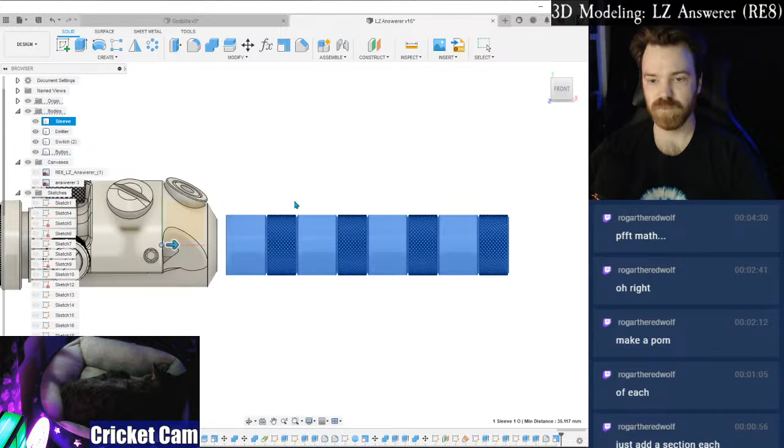And that's going to take a minute. Cool, all right. And then I think I still have a plane somewhere. I thought I did. Where are you? Oh, there it is.

Oh, but I already moved stuff, didn't I? Okay, let's make a new one. We need to go this way, -5. Yep, that's where we were.

Split this guy by this thingy. And then get rid of that. Well, not get rid of it yet, because we also need to move this in. All right, come on, you can do it.

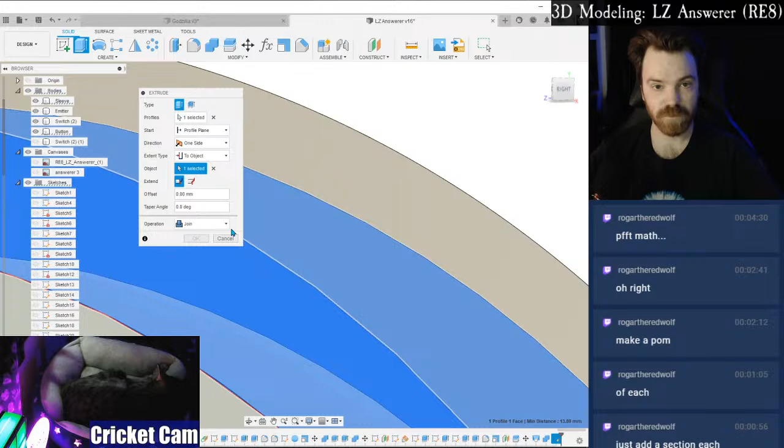There we go. Okay, so that's the blade size that'll come out of that end, and that's way more comfortable, I think. That makes the overall piece 6 inches to there.

And then proportionally, this end looks more correct. It makes the whole thing a lot longer than I thought it was going to be, but it is correct. So that means our total length turned out to be right about 12 inches. That's not bad, that's well within tolerance.

Okay, so do a quick save on this.

And then the only thing that we haven't figured out is the label, which means I shouldn't have gotten rid of that YouTube video. Let's see if I've got it in my history.

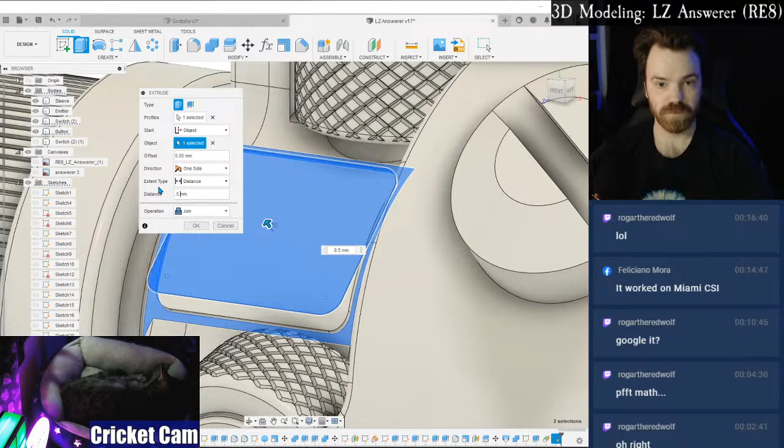All right, there's our label in that style. That's what that will look like. Does that look too big? No, that looks about right on, doesn't it?

It might, it looks a little bit close to this edge, so I could shorten it up a little bit. Just kind of pull this in a little bit, give that a little bit more elbow room there.

Yeah, that's why I kind of shortened it a bit, was that it looked a tad big. But as far as the width goes, the width looks pretty right on. I probably could make it a tiny bit narrower if I'm going to be that picky, just pulling the sides just a little bit.

There we go, all right. It's there for somebody to fill in themselves, cause I'm not gonna figure that part out.

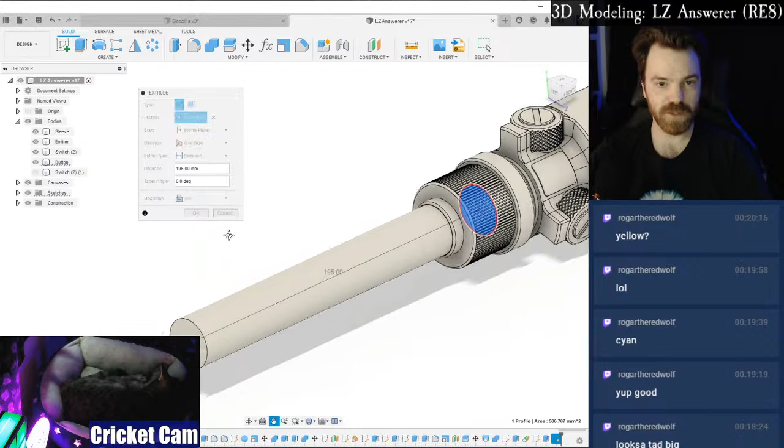Okay, we have one vote for yellow. Mora, are you still here? And if so, do you have a thought? Man, that is so close to the emitter size.

We'll go ahead and make another one over here so we can show the double-bladed mode as well.

All right, well, we have one vote for yellow, so I guess we are going to go with yellow.

All right, now this thing is basically steel color. So I guess we'll just, let's see, it looks a little bit weathered though, so maybe we'll give it like a weathered steel look and then do the two black screws there. And then we'll make the label that darker color as well. Yeah, like a rough steel, because it's got kind of those wet weathering patterns on it, you know. Man, that switch section was really tricky.

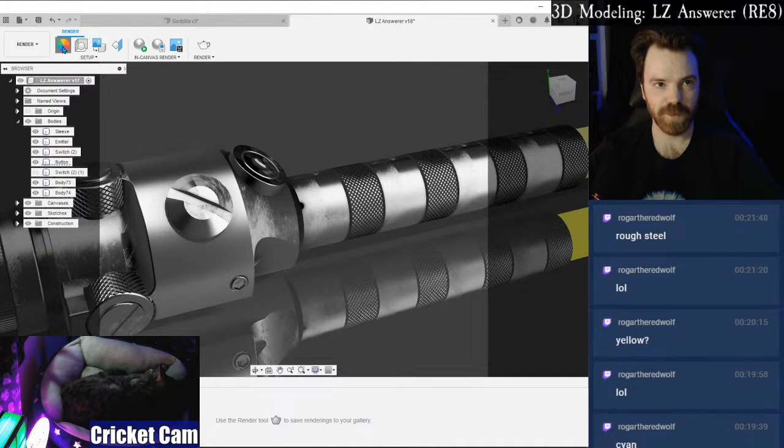Okay, let's edit this. Go in here. Yes, okay. Wait, which one is it? I thought this was the one, isn't it? No, that's the one. Is that the one? What? Okay, that's the one. Damn it. All right, come on now.

Okay, there's that. All right, so now if I get this over these things, using a slightly different texture, and then just turn the color down. There we go. And I just need to do that to this one too. And then I was going to do it to that one.

There we go. And I think for this one, we're going to take reflections off because there's just a lot going on. Let's try in-canvas render, see what it's going to look like. Oh yeah, that looks really cool. All right, I'm sold.

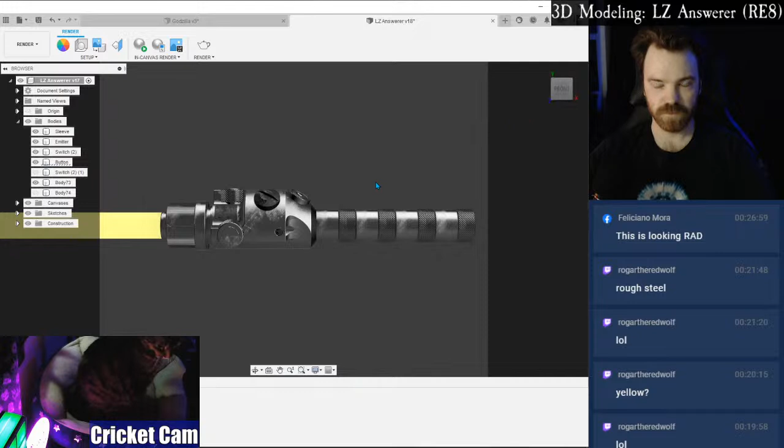Turn that one off, and we're going to go this way. Let's go like this, maybe. Let's see what that's going to look like. Yeah, that works. Okay. We'll do that one too.

All right. Awesome. As soon as that's done rendering, we're going to save and we are going to call it good.

I've got a little bit of work to do to hollow out the middle to make room for potential electronics, if somebody actually wanted to make this into a workable prop, and have the pieces all connect together. This one is not going to be compatible with the other lightsabers because the size is different, I guess. I do have some connectors that I've already made that would put this one together. So technically you could potentially grab like one of these pieces to put on a Star Wars lightsaber, but I don't know, I feel like that would work. That would look a little weird, but that's just my opinion.